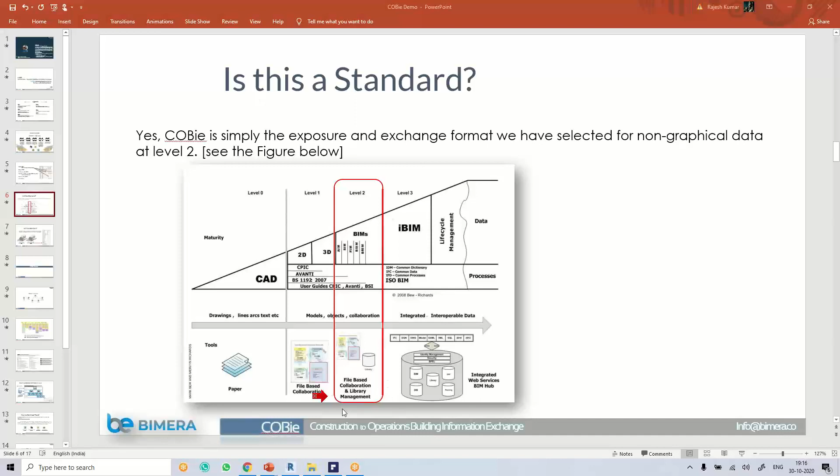Okay, when it comes to level 3, integrated BIM, of course most of the companies are not up to these standards. Okay, let's skip that for now. Level 2, file based collaboration and library management. Okay, so what is COBie actually? How to set up all this stuff, today we are going to see that.

Okay, this is a basic example of how we follow the training. Day 1 and the complete data would be the documentation itself. Now we are not going to discuss any kind of documentation here, because if I start explaining the documentation, it will kill 2 to 3 hours. Okay, so we are skipping it. I'll just show you how it works, that's it.

Okay, well, let's see this COBie process. COBie is very easy, guys, unless you don't understand that basic phenomena, and there are some key concepts. For every tool there are key concepts. If you understand the key concepts, it's very easy. It's damn easy. Okay, so you have to record it. For each and every step, you have to do some personal R&D from your end. Okay, understand?

So what is this 5-step process, as I explained and published on LinkedIn and WhatsApp and some other social media? What is the 5-step process? This 5-step process is enough to create a spreadsheet. Understand? So what is that? Set up project. The first one, how to set up a project, second, how to create the zones, third, select and update, and set up families and create spreadsheet. That's it. These are very basic and easy as well. It's not that tough actually.

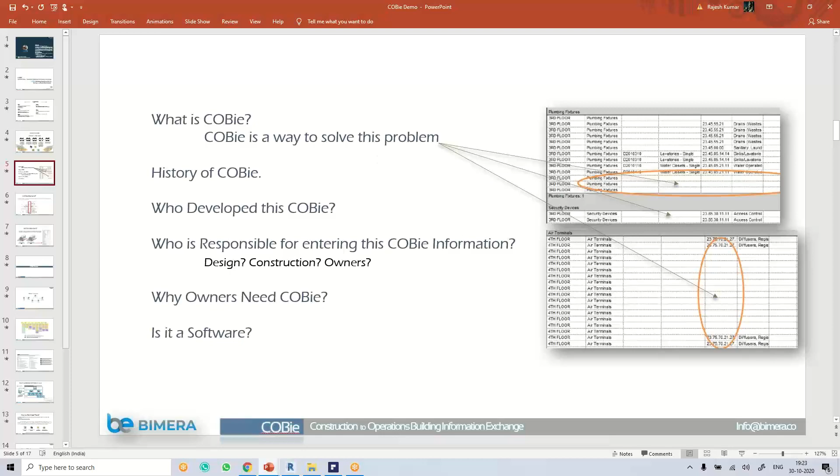Correct? Okay. Finally, is it a software? Yes. Is it a free software or a paid software? It's a free software. You can install it from biminteroperabilitytools.com. Okay, fine. So let me show you what COBie looks like. Let me open one spreadsheet, the basic spreadsheet, how it looks.

Guys, do you know how to download this tool? Or do you know? Sir, I don't know. Okay. No, I don't know. Okay, great. Then I'll just show you.

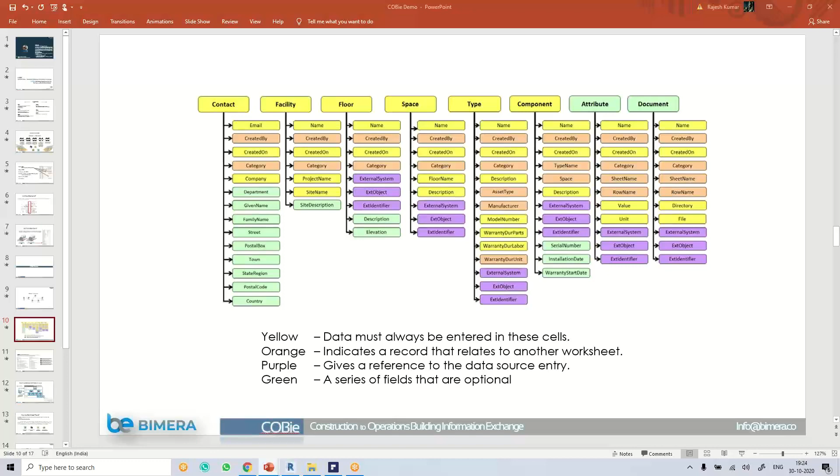Okay, see this. There is a website called biminteroperabilitytools.com, COBie extension revit.php, where it maintains a number of versions. If you're using Revit 2018, you just have to click on 2018, and there are Autodesk Classification Manager for Revit, Autodesk Model Checker for Revit, Autodesk Model Checker Configurator, Autodesk Enhanced DWG Exporter for Revit, Autodesk COBie Extension for Revit, and Autodesk COBie Extension for Navisworks. Okay, for now let's skip this.

Okay, what is all this stuff? What is this model checker and what is the model checker configurator? These are not individual components, not individual tools. When you install any one of these, the rest will be installed automatically. So it's like a package. So if you install Autodesk Classification Manager for Revit, that is what we are going to play with, and Autodesk COBie Extension for Revit. You can download that from here. Let me copy this.

That's it. You just click on download here and it will take you directly to this. When I click on Revit 2021, one setup file will be downloaded. And once you've installed it, you can see it in the BIM tools. In the classification manager we have a number of panels: the classification manager, COBie extension, model checker, and the configurator.

In this demo, I'm going to explain in a very short way so that you can easily understand, and I'm going to skip a few things which are not required. So I'm going to skip the configurator and the model checker. We are going to see the classification manager, which is actually required and a must. You know what required means: if there is a star mark, you must fill that.

So what is a classification manager and what is the COBie extension? COBie extension is nothing but this: set up families, set up project, contacts, zones, select, update and create spreadsheet. That's it, this is what the COBie extension is. Let me place it into the same position.

Now the classification manager - what is it actually? I told you before, every company should maintain some proper standards, in the form of two ways: one is the Omni class and one is the Uni class. These are actually the database.

Most of the companies will use Omni class. Omni class is also similar to the Uni class, but it is very detailed, well detailed. If you're maintaining some sort of a Uni class, then you can go with the Uni class.

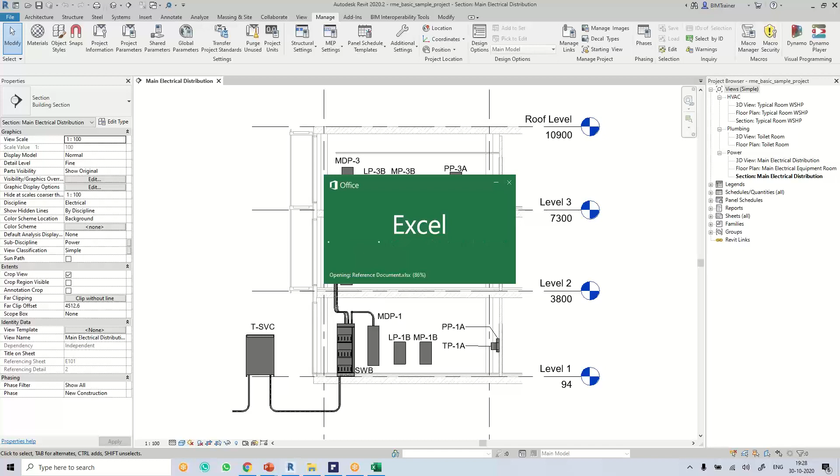What do these colors mean? Why do we have different colors? Let's go and read the basic stuff. Yellow color means it is required - it must be there, you must fill that information. When it comes to orange color, that is a reference from a different sheet or from the pick list.

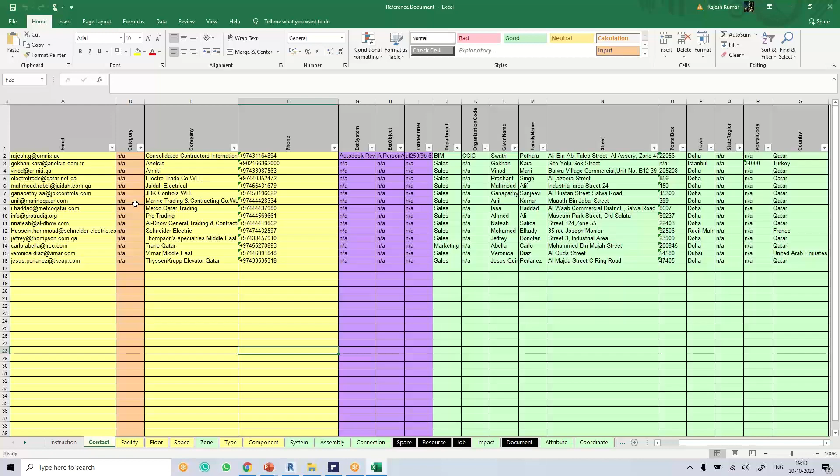So the yellow one is required. It means you must fill this contact information when you submit the COBie spreadsheet. Each and every row should be filled.

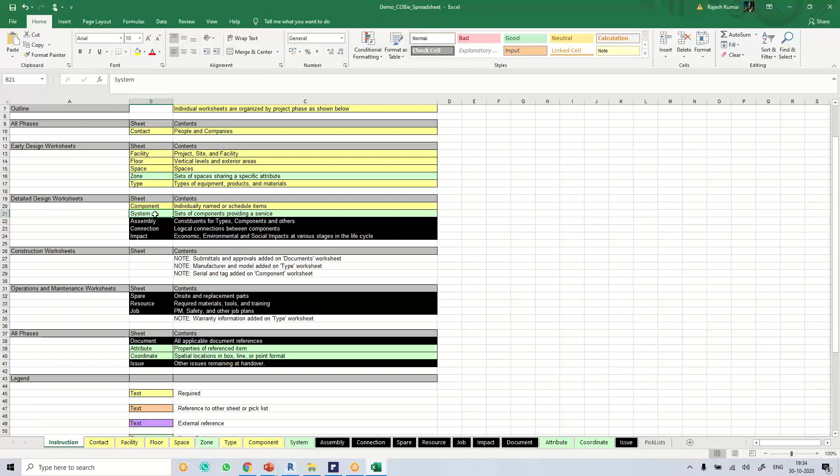And when it comes to system information, like mechanical systems - HVAC duct systems and such information - that's required only if needed, then you have to fill it. Clear? Okay, so let's say this is how actually the data would be.

Now, where are the parameters in this? If I fill a value inside a parameter, where could it be seen in the spreadsheet? This is a tricky question here, and I'll make it simple for you. For example, if I want to fill this company information, what do I do? There is a simple technique here.

What is this? It's a COBie spreadsheet, correct? COBie.contact - see, what is the sheet name here? It's contact, then dot, then company. So where you have to fill that, there is a parameter name called COBie.contact.company. If you fill some information there, it will directly reflect here, it will come and sit here.

For example, if you want to know the department, where is this department? This department is in the contact sheet, so contact.department. And what is this? It's a COBie tool, so COBie.contact.department. There is a parameter called COBie.contact.department. If you fill the value there, it will come and print here. That's it, it's a very easy thing.

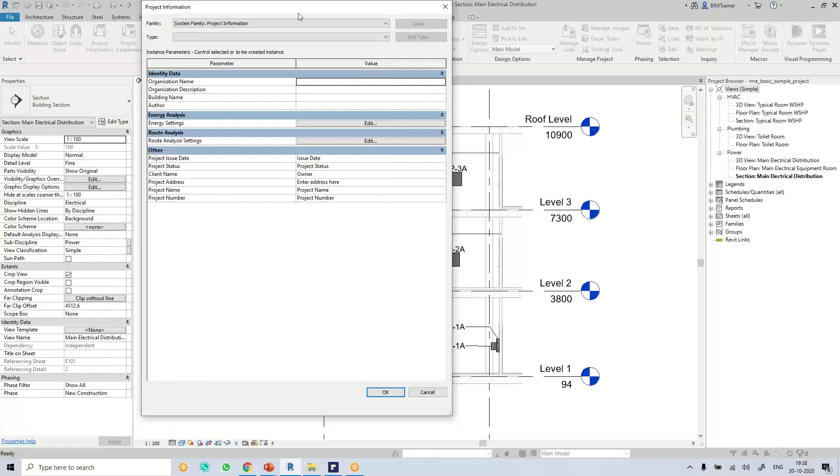So where we don't have information - see, energy settings, route analysis settings, and some other things. Now go to Project Parameters. There are no project parameters related to COBie because we haven't generated anything yet.

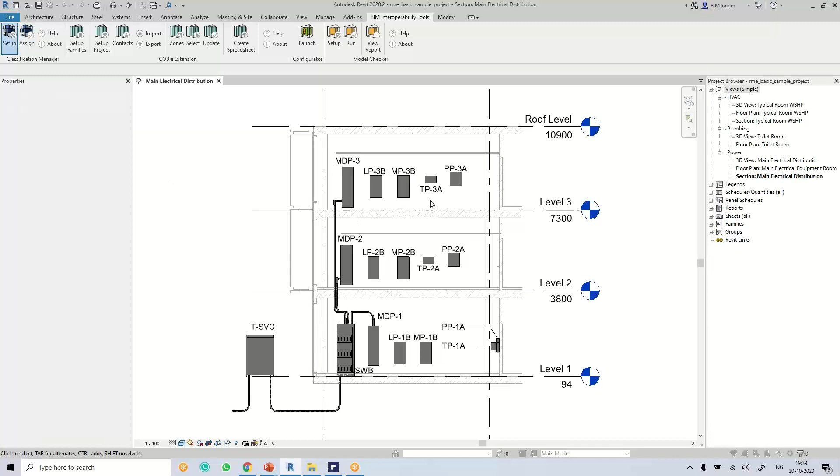Okay, let's start doing that. Before that, once you install this, go to the Classification Manager and click on Setup. This is the basic setup you have to do first.

While doing this step, you have to be confident about which standard, which class of standards you are going to use - either UniClass or OmniClass. These two are quite different, but the data being stored is almost the same; however, the way of representation is completely different. So what is OmniClass and what is UniClass? Let me show you here.

When you fill this in, OmniClass standards are completely different from UniClass. For example, this is some number information, and this Site Product is some other information - these two are in two different fields.

When it comes to UniClass, PR underscore 15 - what is PR? PR is like products which will replace the table from construction. There are a number of different tables actually. I couldn't show you all here because it's just a demo. So what is PR, what is EF, and what is AC? I mean, which are the activities.

For each and every process, they are maintaining some sort of code from a codification manual. It's not that you blindly follow yourself - there is a proper codification manual and you must follow that.

Let me minimize this. So now I have used this UniClass and OmniClass. If you don't see any recent items, you can go to the public library and choose either the OmniClass database or UniClass database. Let me go with the OmniClass database for now.

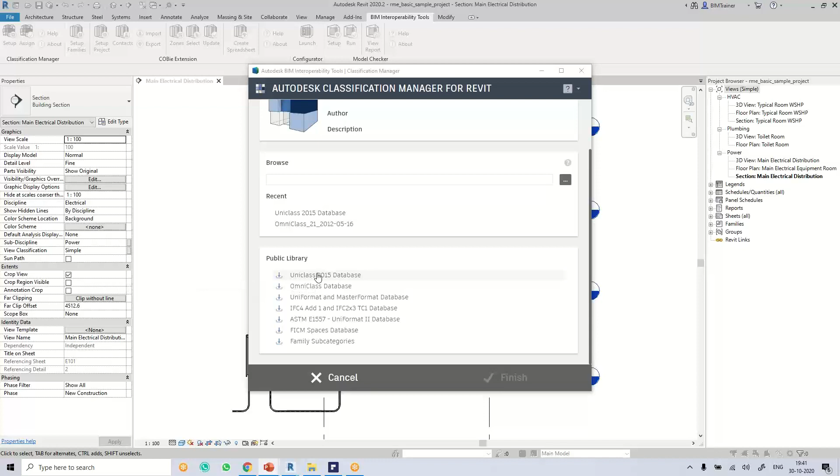See, this is from CSI, and this is Autodesk with the description: OmniClass database for the Classification Manager for Revit. This is a database in XML format. Let's click Finish here. Now it's importing some information and adding new parameters into this model.

Okay, done. Let me go and check - go to Manage, Project Parameters. Now see, there are a number of parameters, 1 through 10. Some 8 or 9 parameters were added, like Classification.Facility.Description.

Facility dot number, OmniClass 21, description 21 number, description 22 and 22 number. What are these 21 and 22? It will take time to explain, but let me go with this flow. Let's click OK. When I click on project information, see, the classification dot facility description and the number are added here.

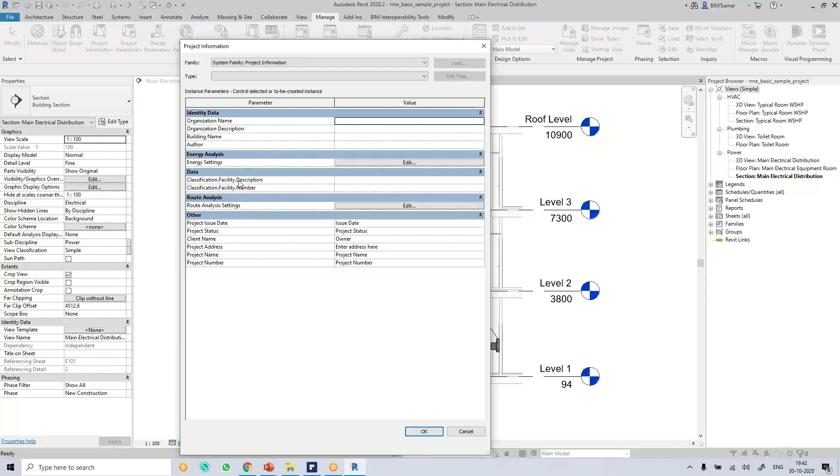How do you know that? Classification dot facility. No other parameters will be created by us using dots. If there are a number of dots, it means it was created externally. So that is the only way you have to remember whether the parameter was created by COBie or by you. So classification dot facility dot description. Okay, fine. Where else can you find it?

For example, go to this edit type, where there's nothing here. Let me select one of the model elements. Can I see the parameters here? No. If I click on edit type, see, inside the data group, classification, OmniClass 21 number and 22 number and 21 description and 22 description. Why are these empty and who will fill this? Do you want to fill it manually or will it fill automatically? So you do have these kinds of questions in your mind, correct?

So when it comes to COBie, there are two methods actually. One is autofill and the second one is manual fill. Some information would be filled by yourself, but you have to do some steps. And in most cases, around 25 to 35% will be filled automatically, and the rest of the data you have to fill manually.

So COBie is not that easy. You have to maintain a lot of standards. If something went wrong, you should know how to troubleshoot it. Sometimes it will not revert; you can't undo it once it is done. Then how do you do that? There are a lot of steps to do. That is the troubleshooting. For every process, if you've done something wrong, there is a solution for it. You should know how to resolve it. That's it.

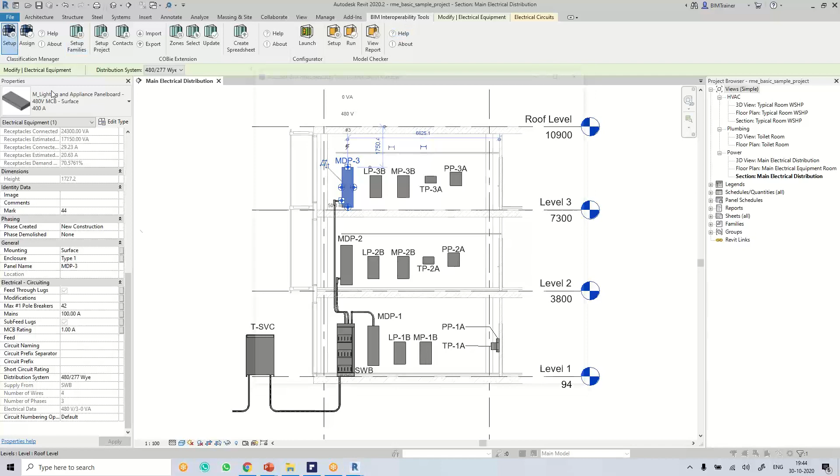Now let me explain how to fill this data. Click OK now. It's done. Go to the BIM tools. When I click on setup here, I choose the database. That part is done, so I don't want to do anything here. Let me cancel. This is required only one time, to choose the proper database, and then you will never touch it. What is assign here? When I click on assign here,

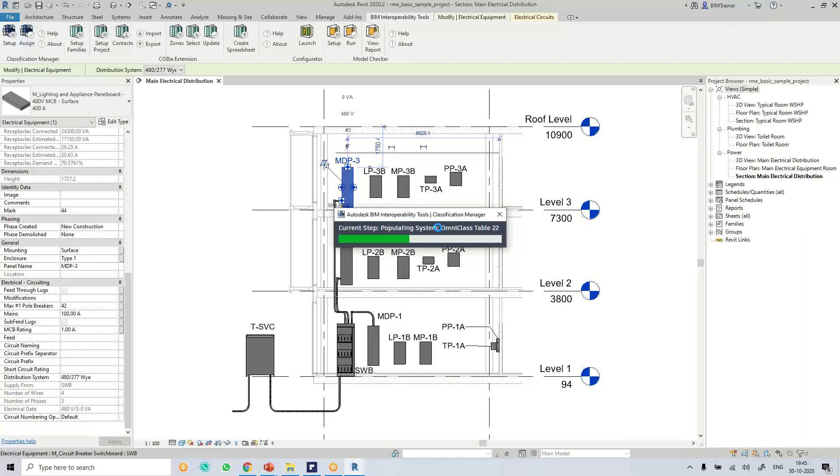it is reading OmniClass table 21, table 22, table 23, and there are a number of tables actually. What are these tables? You will come to know now. Let it load. It won't take much time, less than 10 to 15 seconds. It's done now. Now classification, assign classification and options. So assign similar classifications and set COBie parameters. You must check this, otherwise it will not fill any COBie parameters. You will understand it later.

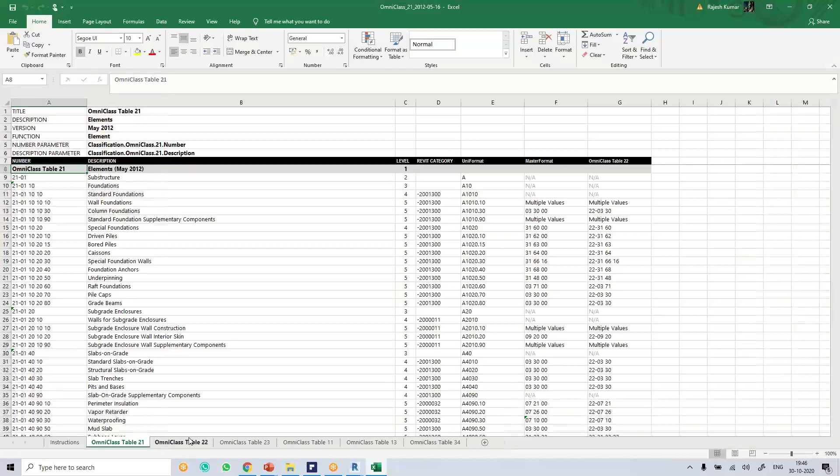So facility, OmniClass table 11. What is this table 11 here? And what is OmniClass table 21, 22, and what is element here? If you want to understand, let me show how the OmniClass table, the spreadsheet, looks. So this is a standard actually. The instructions are quite common. OmniClass table 21, read this. OmniClass table 21, table 22 and table 23.

Those who are in the planning department or the estimation department can easily understand OmniClass table 21, 22 and 23. Guys, if you want to work with COBie, you have to sit with your procurement or planning department, those who are doing estimation, to understand the standards of OmniClass and UniClass, because only they can tell you exactly what type of standards they are maintaining.

So OmniClass table 21, 22, 23 and table 11. What is table 11 here? What is table 13 here? What is table 34 here? So for each and every table, when you are extracting or filling information, it is reading the data from this.

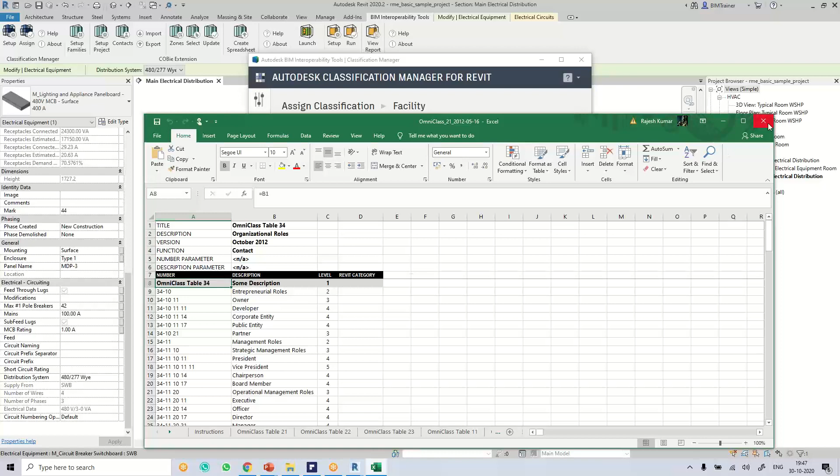Understand? So this database, the complete database, we have loaded with the help of the setup. So that's what we loaded here, and now we are assigning from it. Okay, so let's say I just selected one element here, correct? Let me select this. Let me go back, and this is a component. Let me show you which is element information, which is related to the facility information, and which is some sort of a, okay, you will be knowing that later.

And let's say what type of a table is this? Let's say this is an educational, this is a training institute or something else. So let me go with educational facility. When I click on educational facility, I mean, let's say assign here. So that is assigned, and it's saying parameter COBie.facility.category was not found on element project information. Sometimes it shows the warnings, but it will be executed once.

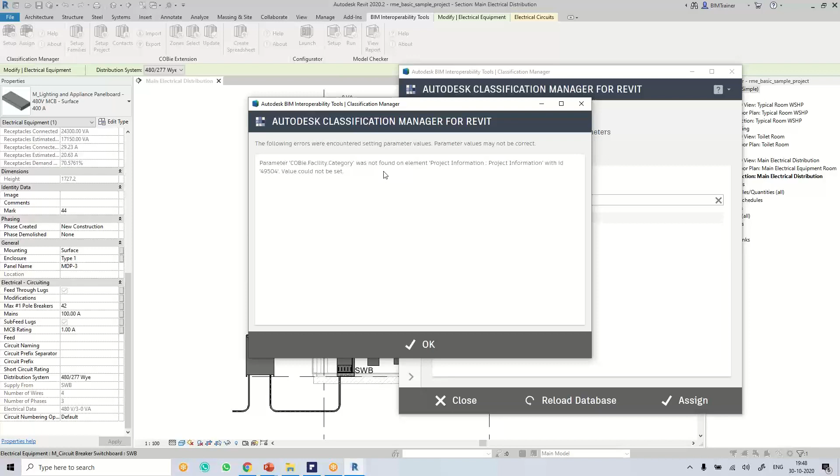I mean, it has a number of steps inside it. The first step, the second step, the third step, and the fourth step. So the first step it is cleared, the second step it was filled, and the third step it was filled. Then when it comes to the fourth step, if it is not filled, then it will show a warning. So let's keep this warning for now because we haven't created it. We will create that later. Okay, so the OmniClass table 11 we have already assigned.

Let me go back to the element and let's read this. Table 21 and table 22. What are these tables 21 and 22? If you understand the Revit hierarchy, each and every element has its own ID, correct? Each and every type has its own ID, each and every family has its own ID, and each and every category has its own ID. ID means element IDs. So element IDs for the elements, the types, the families, and the categories are different. So this is what we are about to fill in the same way.

Let's say when I select the electrical equipment, it's directly showing that you have selected an electrical equipment, and what type of electrical equipment is it? So I want to fill some information into the classification because it's a classification manager. We have some parameters added over there. Click on edit type. We have OmniClass number and classification. These four are related to the classification. So I'm going to assign something from table 21 into these parameters. I'm just mapping it. Let's see how to map that.

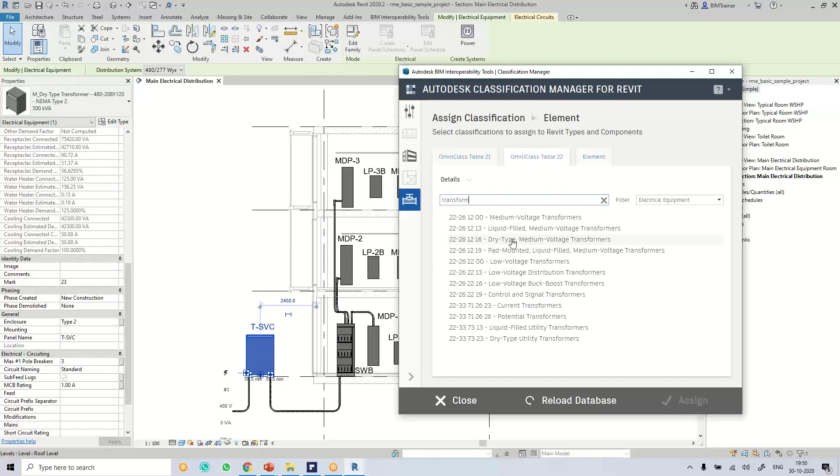Let's click OK now. So what is this? Of course, it's an electrical equipment and it's a dry type transformer. So let's say I start typing transformer here. Now it shows medium voltage transformers, liquid filled transformer, and dry type transformer. So if it is a lighting and appliance panel board, if I start typing lighting here, I can see lighting control panel boards.

It's different actually. Let's say I make this final for now. You have to maintain some standards. There are documents you have to work with, and based on that document, you have to understand to which category it is related exactly. You should not go blindly. For now, as this is a demo, I'm just explaining instead of wasting time. So lighting control panel boards, let me click on assign here. It's done. The warning is not related to the classification, it is related to the COBie.

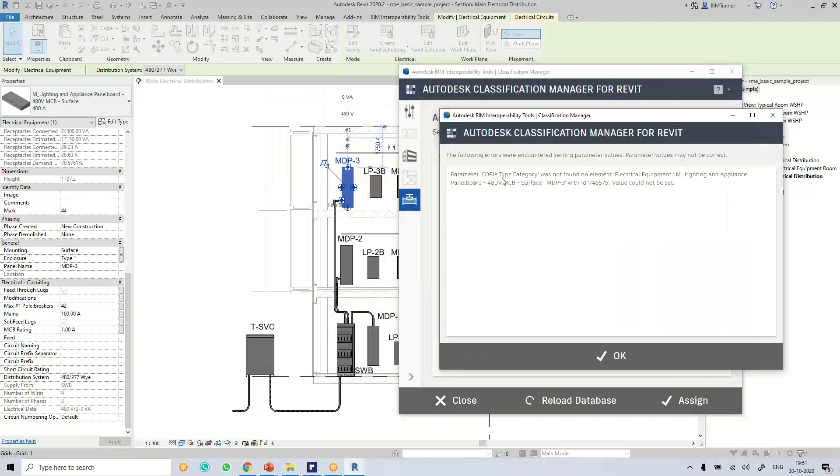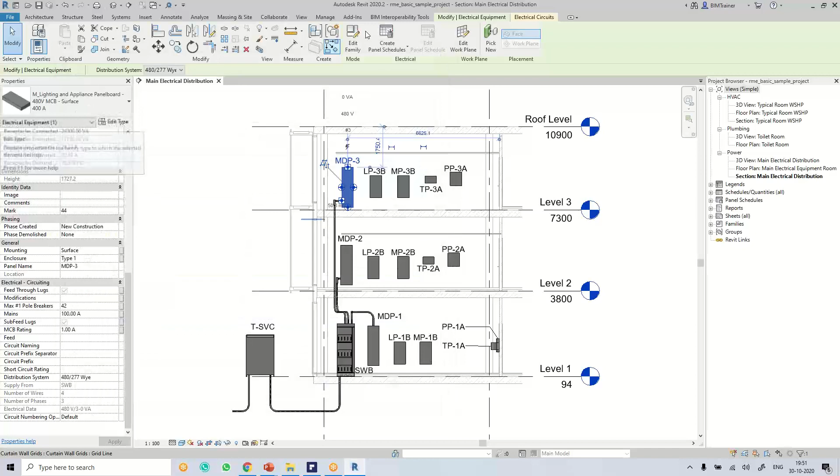So let me click OK now. Click cancel here. Let me close this. Now when I go back to edit type, the classification related to table 22 is assigned here, 22 number and 22 description. What about 21 now? Let's go to BIM tools and assign again.

So I have selected the same thing. So OmniClass, which is already assigned. Let's go back to table 21. And if I say transformer, sorry, it's a lighting panel board, right? So if I start typing lighting here, it's not showing lighting at all. You must fill this data, but it is not showing any panel board.

Okay, let me find it with the panel board information. Let's say it's a panel board. No, it's not there. Okay, what do you say? MDB, LDB, lighting distribution, no, nothing. Then you have to choose based on the standards. Okay, based on the filter.

Okay, electrical equipment, see there's services and site work. Is this related to the services or to the site work? Okay, let me go with the services. Is this related to electrical or integrated automation? Electrical. Expand this. Okay, what is it related to exactly? Electrical service and distribution? Yes, of course. It is related to the distribution. And okay, electrical service and distribution supplementary components.

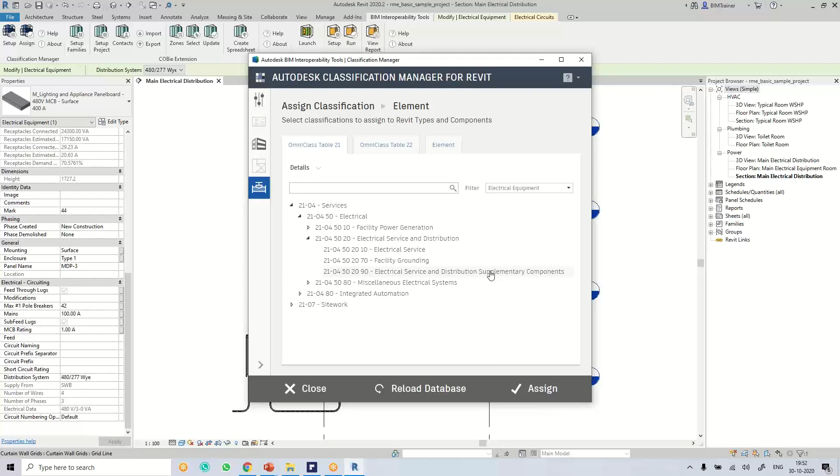If you could not find the actual category of this, then what do you have to do? You have to open some documents which are required to find out what to fill in this case. Okay, clear now. So let me assign this for now. It's saying it's already assigned here, and there is a warning which starts with COBie because there are no parameters related to COBie, because I haven't added them till now.

Okay, let me go back to this edit type. See now, it's so easy, correct? When it comes to the classification, it is very easy. So OmniClass 21 and 22 were filled. Okay, now these are not the only things, right? We have a lot to fill. For example,

when I click on this, oh, what is this? It's a conduit. Okay, so when I select this conduit, why in the OmniClass table 21 filter is there no conduit at all? Then how can I fill this information? If there is no conduit at all, how can I fill this information here?

Correct. So when I select this OmniClass table 21, if I shift to this, now it is saying it's a conduit, because it knows what the proper selection was. It knows what was selected, and it's saying conduits. But in OmniClass table 21, there is no special category like conduits, so that is the reason it is in a dilemma now. So you have to think which category it represents. Okay, so then you have to fill it manually.

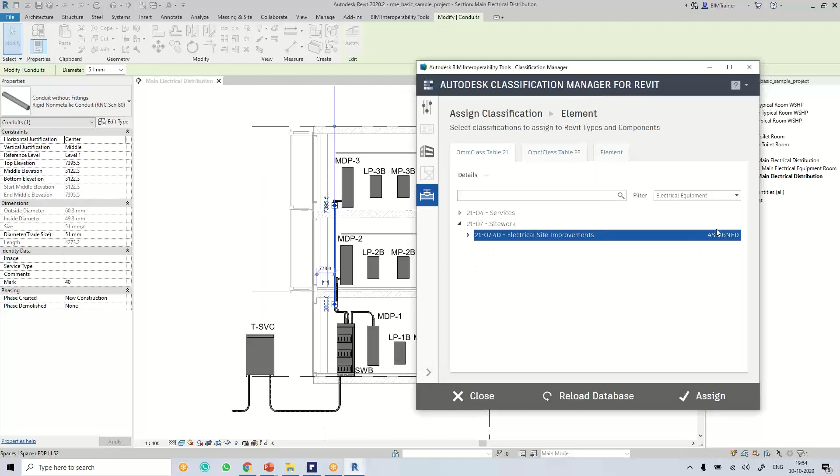So if it is related to the site work, let's go to site work and electrical site improvements. Click assign. Okay, so it's done. It's saying it's assigned here. So when I click on edit type, it is assigned here. Electrical site improvements.

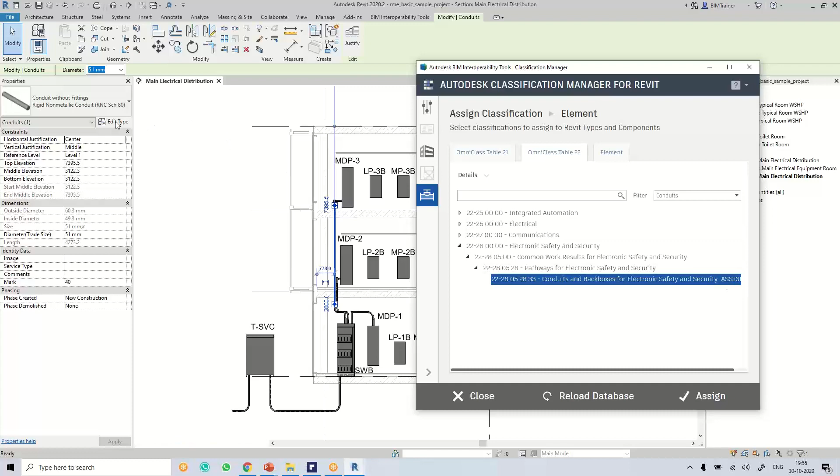Okay, in the same case, let me go with conduits, like safety and security and common work pathways. Select this conduits. That's it. So it's assigned. It's saying it's assigned here. So when I click on edit type, it is assigned now.

Okay, so these are the classification parameters, and how to load the complete parameters. I'm going to create a spreadsheet now to see how it exactly works. Before that, let's create the COBie parameters as well. Why? Because we keep getting the warnings. COBie.Type.Category is not there, COBie.Type.Name is not there. So these kinds of warnings we keep getting. What we have to do is load the COBie parameters into each and every element. Okay, how to do that?

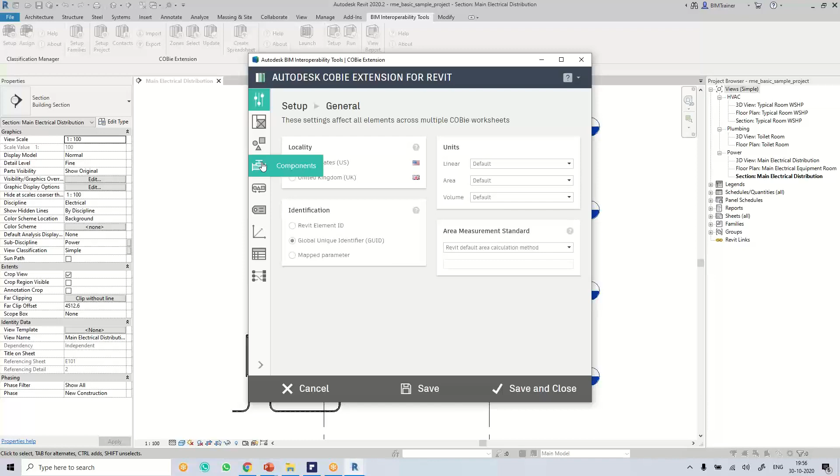Go to BIM tools again. Not this setup or this assign, we have the COBie extension. So just click on the setup project here, and here you have to maintain some proper standards. So you just have to maintain some proper standards. So what is this Autodesk COBie Extension for Revit?

Let me expand this here. So general, spaces, types, components, systems, attributes, coordinates, schedules, parameter mappings. That's it. We don't have anything else, guys. It's very, very easy. We have general, spaces, types, components, systems, but maintaining this is not that easy actually. Okay, so click on general.

Okay, click on General. So let's go one by one. It won't take even 5 minutes. Okay, we have 15 to 20 more minutes. Yeah, 15 to 20 more minutes. Let's finish it very fast.

Okay, so Setup, General. So I'll just go with the US standards and linear. If I'm using a metric system or imperial system, based on that system we have to go with feet or millimeters. So let me go with millimeter now. Square meter, and volume is cubic meter.

And area measurement standards, we have a number of standards, like BOMA, like industrial buildings. For industrial buildings, there is a different kind of area measurement method. If you want to understand all this stuff, you have to attend the sessions actually.

When it comes to the identification, it's either an element ID or a GUID. Generally it comes with the GUID, but for now I would like to show you something, so I'll just go with the Revit element ID. The default is GUID only. Okay, so the Revit element ID. Come back to the spaces.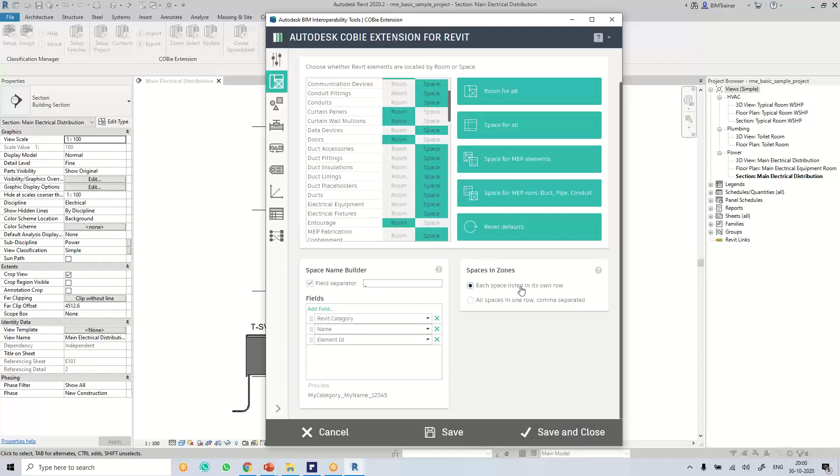Okay, so let me go with this. Each space listed in its own row. Let it be. Again, the same for the type name builder. And when it comes to the category, for example, if I want the category information to be filled here, what do you do exactly? The Revit OmniClass parameter, it's under the type and the category. For example, if I go to the Excel, where is the Excel? Let me open that Excel here.

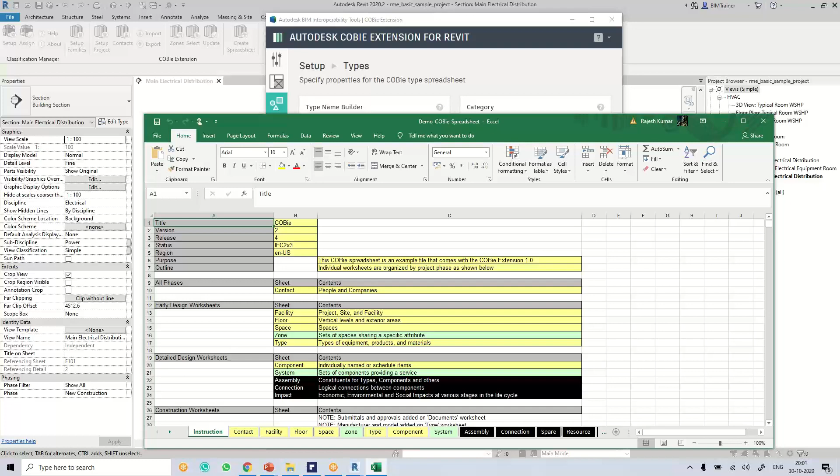See, if I fill this category information here, it will come in the type dot category. So inside the type, inside the category, it comes and sits here. See, type and category. So COBie dot type dot category will be filled if you fill that information here. So what are we saying here?

So OmniClass, let me go with the class OmniClass table 23 parameter value, and let me go with the OmniClass table 22 and 21. Why do we have to take this OmniClass table 23 and table 22 and table 21? That is because of the standard, because we are following OmniClass. Then why we have a number of things here, you will know that later. Okay, not now. It would be very detailed actually. So fine. Description, it's a family type, leave that as it is.

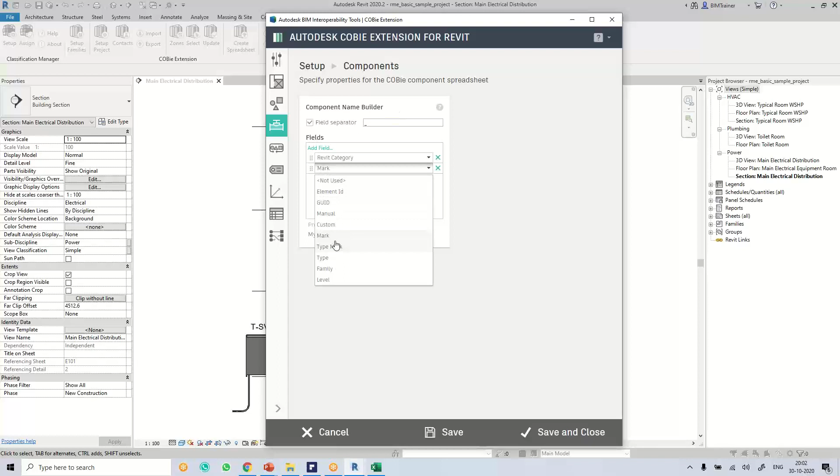So when it comes to the component, components is a different sheet again. Okay, if you fill something here, it would be directly reflected into that sheet. Okay, so it's a component name dot builder. Let me go with Revit category, let's say family, and if you want to add element ID: Revit category, family, and element ID. Okay, let me go with systems, and system it is fine. So let me go with OmniClass 21.

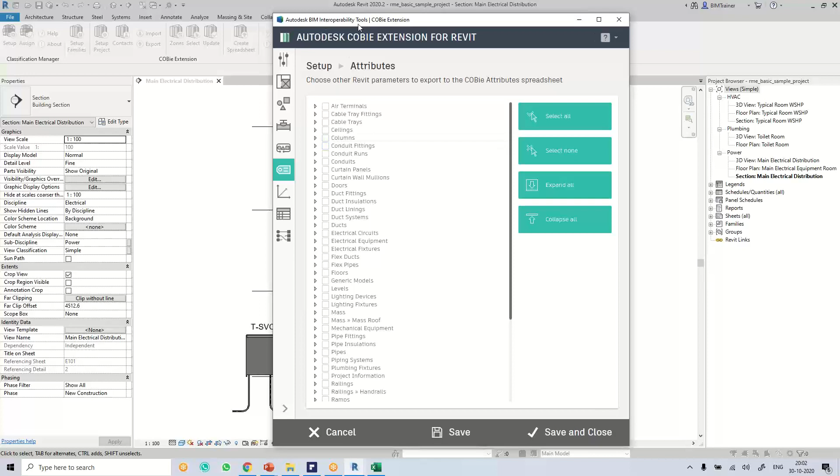Okay, so let me explain to you what these attributes mean. Attributes are nothing but parameters, guys. For example, if you want to export some parameters which are related to any of the elements here, for example, the parameters of a particular electrical equipment. Let me go with the electrical equipment here. I just export selected here.

What is inside the electrical equipment? Let me expand this. So I can see the type parameters here, and I can see the instance parameters also here. Okay, you can turn on and turn off which are required and which are not required. Okay, so for now, let me go with electrical equipment, the complete electrical equipment, type parameters, and instance parameters as well.

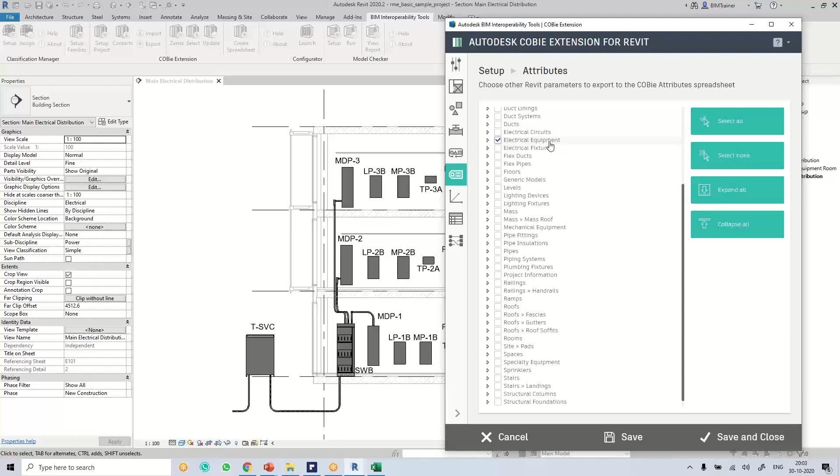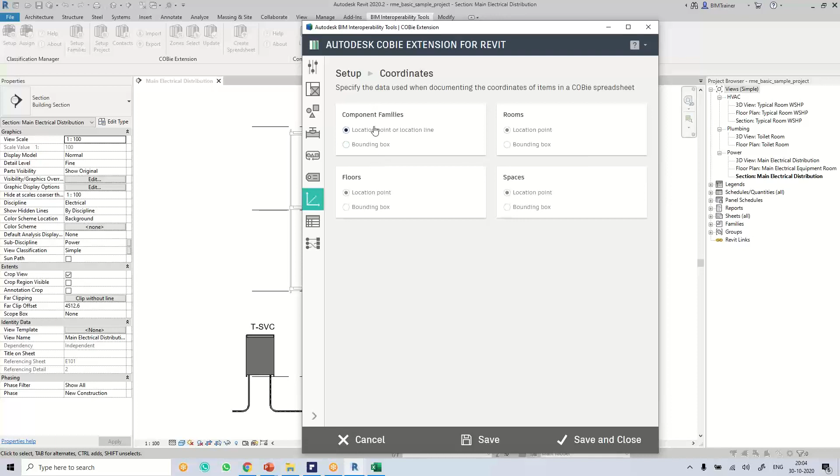If you are a Dynamo expert, basically I'm an automation expert, so when I need this COBie spreadsheet, I'll just go with the bounding box information, not the location point information. Why? Because if you want to create a number of views for each and every clash, then I need bounding box information. So what I do is, I'll just go with the bounding box. Okay, fine, skip that for now.

And it's parameter mapping, guys. This is a very dangerous thing when, for example, you want to fill data into a particular spreadsheet. For example, I want to fill some data inside the description, the value of this far clip offset or something like view name information. How do you map this view name parameter with COBie dot type dot description, which is in the type sheet?

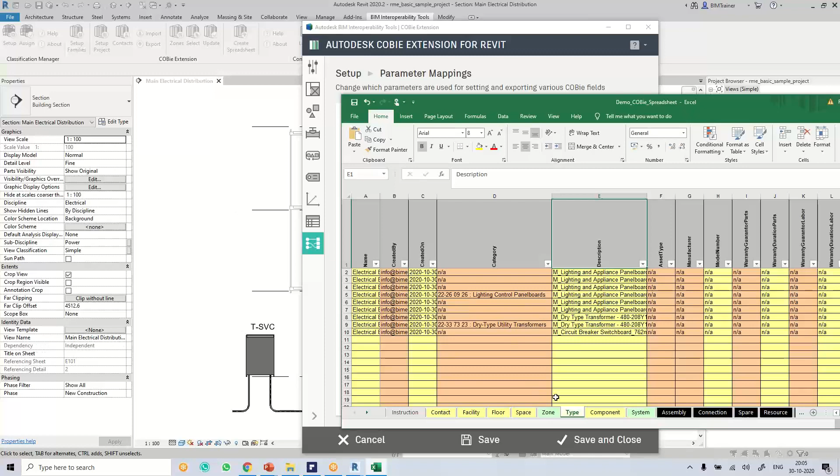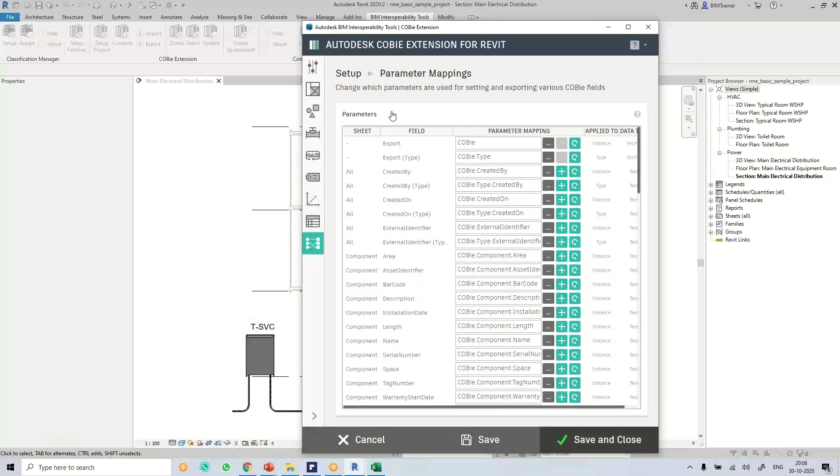That is the technique here. That is what we call parameter mapping. Okay, so that's parameter mapping. So now I'm done with this. Let me click on save and close. It's done, and it's exporting.

It will take some time. Guys, do you have any questions till now? Anybody? Anyone have any questions? No, sir, no problem. Okay.

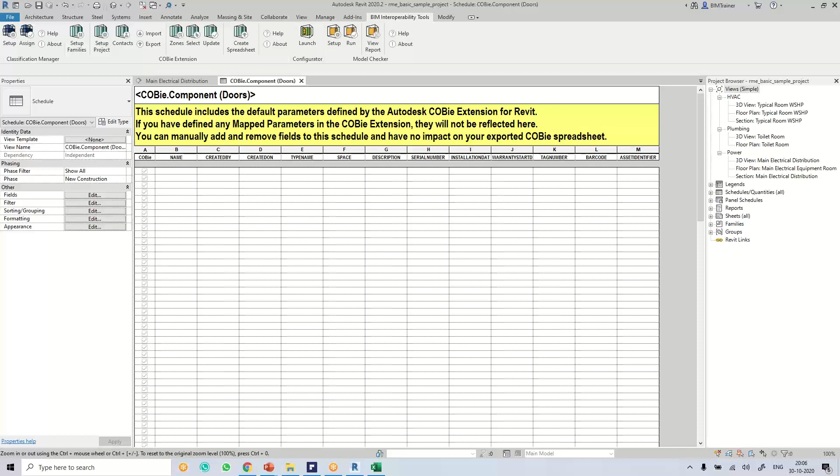So this is how actually the COBie spreadsheets were like. If I click on schedules here, see COBie component doors, windows and room spaces, duct systems and electrical circuits and piping systems and switch systems. These were created by default, because we have chosen over there. That's the reason they were created. Let me close this.

And when I select any of the model element, now I can see the COBie parameters here. Correct? So are these only the COBie parameters? Don't we have anything else?

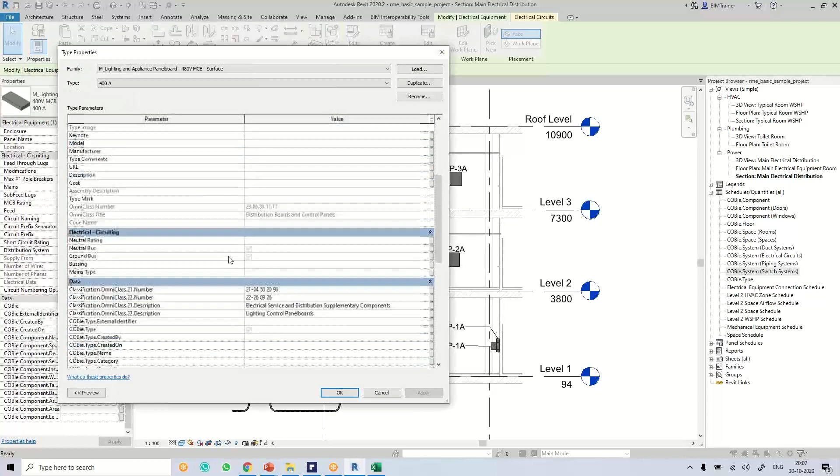Click on edit type. Now you can see the number of parameters created within the type. Let's understand the basic thing: we have COBie dot created by, COBie dot created on, COBie dot component dot name. So these start with COBie dot. Here for each parameter which starts with COBie dot type dot...

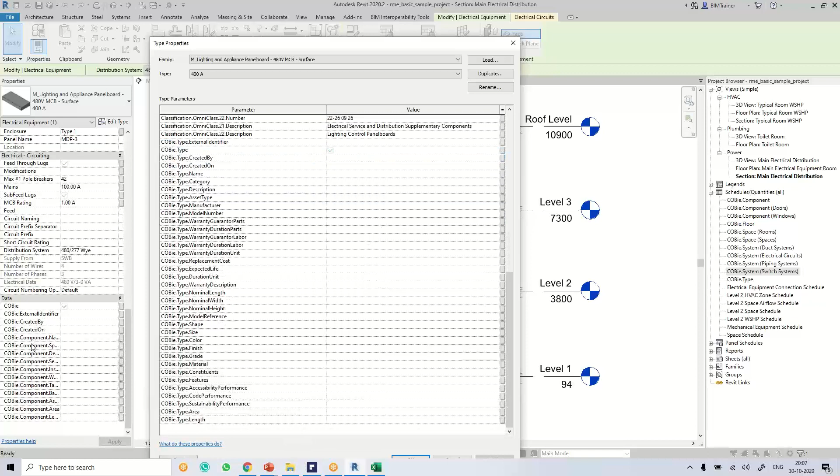Because why? Because these are type parameters. So these are type parameters and these are the COBie parameters. So COBie instance parameters and these are the COBie type parameters. Understand? That is the reason we have two different things. COBie dot created by, again we have COBie dot created by, but it's a type created by.

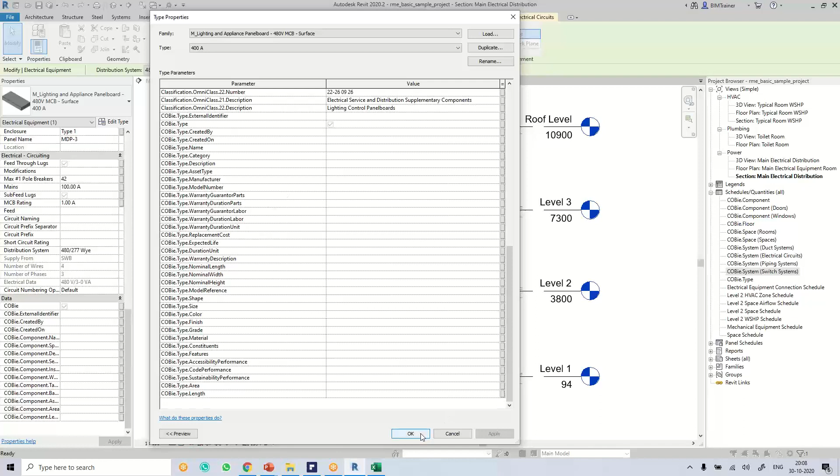Yes, Abdul, it will take a lot of time to understand the setup and all. Okay, let's click OK now. It's done. Now what is the next procedure?

For example, if you want to export this information, there is one more step which is pending, like contacts. Because the model should know who has created this. In that case you just have to click on the contacts. When you click on contacts, like created by, so nothing.

So let me create one email ID: create a person, info at bimera.co, and company name it's like BIM Era Private Limited, and phone number 055749192.

Category - what is this category here? So who am I actually? What type of a person am I? If I'm a designer, if I'm a modeler, okay let's say I'll just go with designer. Let me set this as a designer. Now this is the category code for the designer.

And these are optional information. Why is this optional? Because these are cyan color information. Given name, let's go with Kumar. Family name it's Golla, department it's BIM department, organization code it's BE 1923. Okay, and street name 01.

22336 something, and town it's Dubai. State region are the same, like Dubai only. Postal code 22336 and country it's UAE.

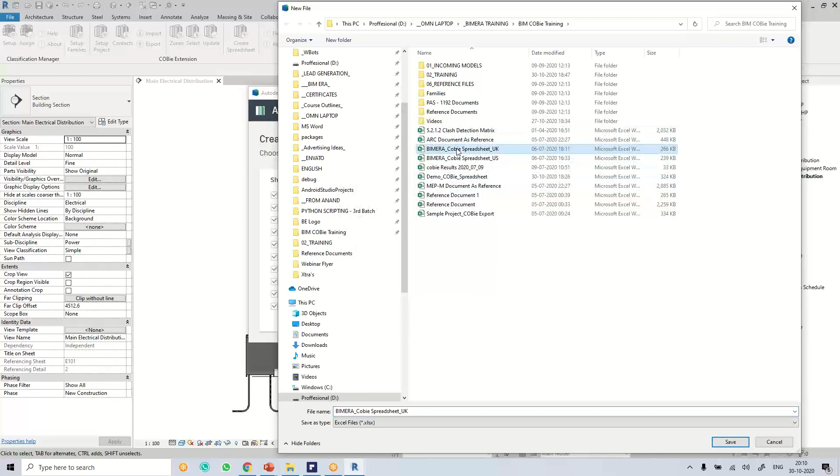BIM Era COBie spreadsheet, demo COBie spreadsheet. Let me go with this. Replace with.

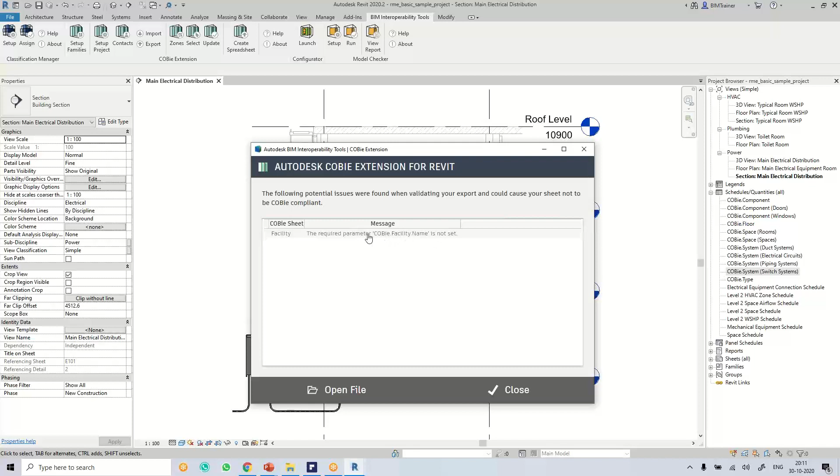Okay now what it is saying, this is a warning box guys, so this is a warning. So what it is saying: the required parameter COBie.facility.name is not set. Okay so where do you have to fill this? Where do you have to fill this? You should know this. Before that, let me go and open the file.

So when I click on contact, see the information which is filled by me - it's here. So I'm the designer and the company name and the phone number information and the department and organization code, Kumar Golla and street name and Dubai and 22336 and UAE. So if you filled that over there, then it comes to your sheet. I mean, those who are acting as different roles, their information should be filled here. You just have to create a number of contacts.

That's it. Okay, so when it comes to the facility, see where I haven't filled anything here - I haven't filled anything here, so it's empty now.

So when it comes to the floor, I haven't filled anything. When it comes to space, nothing. Type, component, see nothing here. System, nothing, and attributes, nothing. Coordinate, nothing. Okay, let me go with at least some basic stuff.

We have 5 more minutes. So when I select these elements, I would like to fill this information and I want to see how to fill it. If I want to play with the electrical model, electrical equipment, then I have to go to the view and create one schedule quantities.

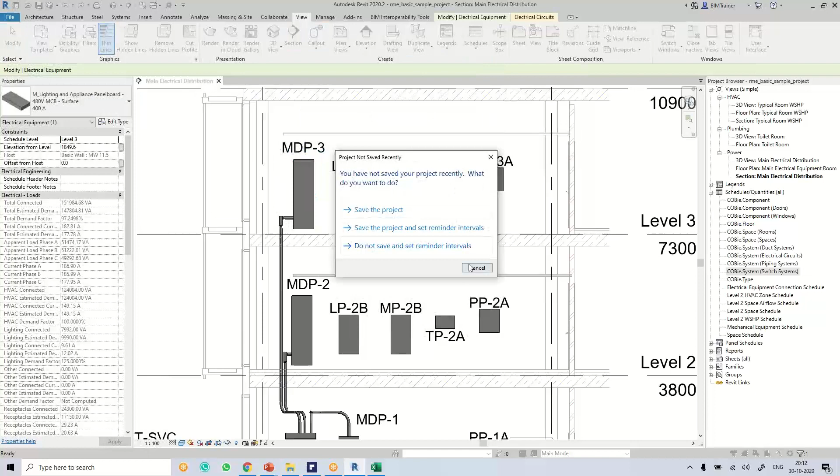I'm going to show you how to do this. It's like electrical equipment, click OK. And this is a different spreadsheet, not like a normal schedule. It's a COBie schedule, so I have to fill all the stuff, COBie.type.

So the rest comes with all the COBie.type, so I have to fill everything. So what about the rest of the parameters, should they be filled? Of course they should be filled, but only when it is required.

Let me explain. See, there is a COBie.type.length, where we have length information here, and if it is required and you want to map these two, you have to bring the information from here to here. Understand? So in that case, since it is required, let me click OK.

So I have a number of elements here, and these are already filled. Let me go back to this sorting and grouping.

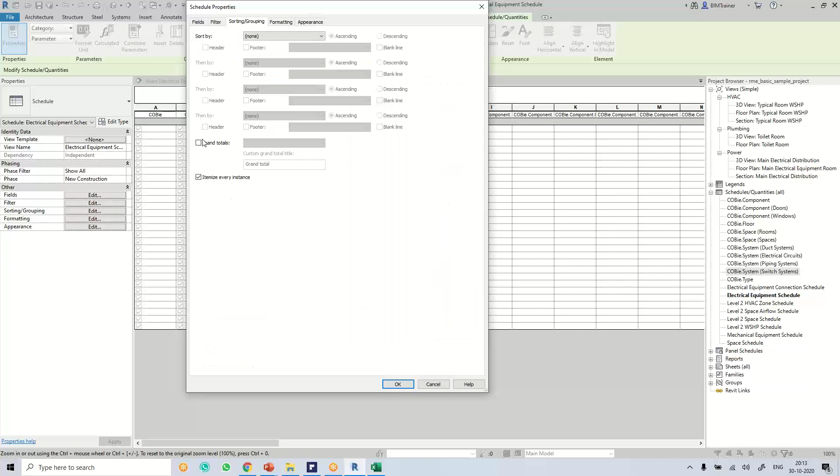Why did I set COBie.type to the beginning? Because if these two are not checked, you cannot export this COBie spreadsheet, even though we have some information inside the COBie.

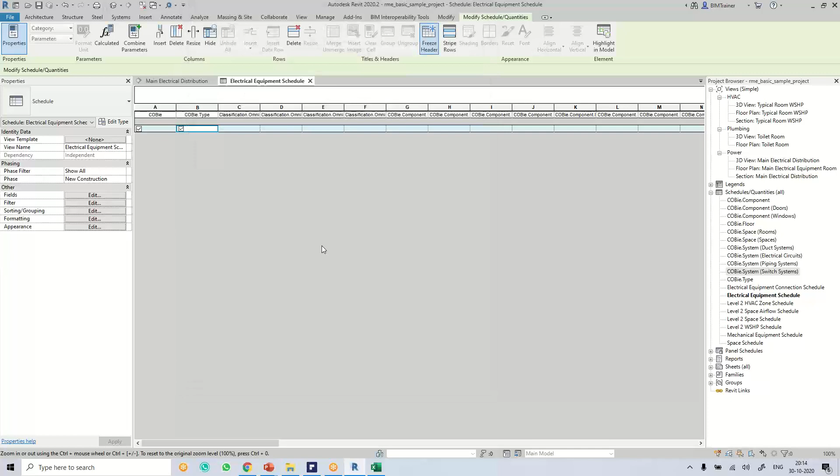Let's see, we have some information here already, but in the COBie spreadsheet, it's not filled, correct? Okay, let me go to the BIM tools.

If I click on update here, okay, set all for all, apply and close. Which is updating some information by itself.

So what is that? Created by name, net area, type.name, type.category. Some information will be filled automatically.

See this? Component dot name, COBie dot component dot name. I mean, see where there is a hyphen, see surface, and where there is an underscore, see electrical equipment is a category, M lighting and appliance panelboard till surface, that is a type family name, and the next to last 6 digits were the element ID.

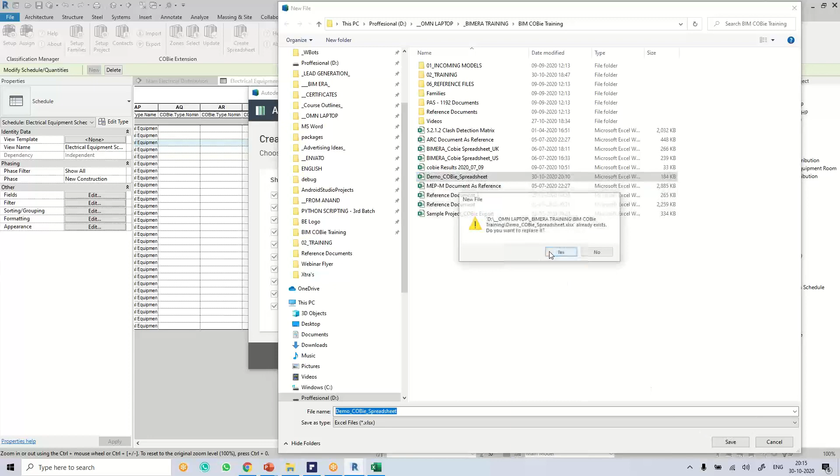So this is how it will be filled by itself, some set of information which is already there. Now if I create the spreadsheet, which is already closed, right? So if I create a spreadsheet, let me go with a new file, the same demo COBie spreadsheet. Let me replace this, and now I can see some sort of data.

That's it. Okay, now again, this is a warning. What it is saying: electrical equipment, M lighting, appliance, panel board, surface, and surface used by multiple elements. I mean it has the same naming convention. So you just have to fix these two actually. Understand? That's the reason it is showing that.

Okay, let's skip this for now. I want to open that file and COBie spreadsheet. In the contact information, it's common, and facility, floor, space, zone, type. See, now it is filled.

In the type name, earlier it was completely empty, but now it's filled with some information here. When it comes to the component, again earlier it was empty, now it was filled with something else.

Understand? So this is so easy to create, but when you create, when you're doing sort of things like system information, attributes, I mean the parameters, the number of parameters, see how big it is. We have a total of 2681 rows.

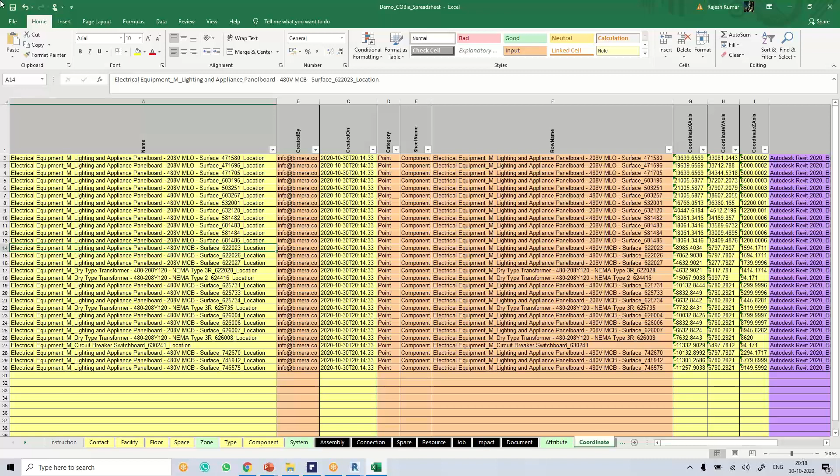It's not that easy actually. There's a lot of documentation that should be there. You have to understand the basics, the basic documentation. What are those documentations? It's like PAS1192. You have to understand what PAS1192 is, and PAS1192 BS standards, and ISO 19650. Out of 19650, there are some topics. You have to filter out all that stuff.

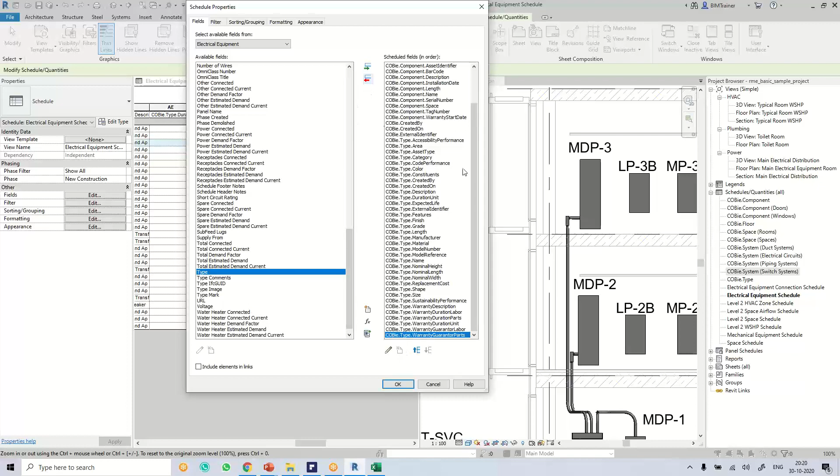Let me show you. For example, let me go to the electrical equipment schedule. Go to view, fields, sorting and grouping. If I go with the type - oh, there's no type actually, let me add type here. Okay, type is added at the last.

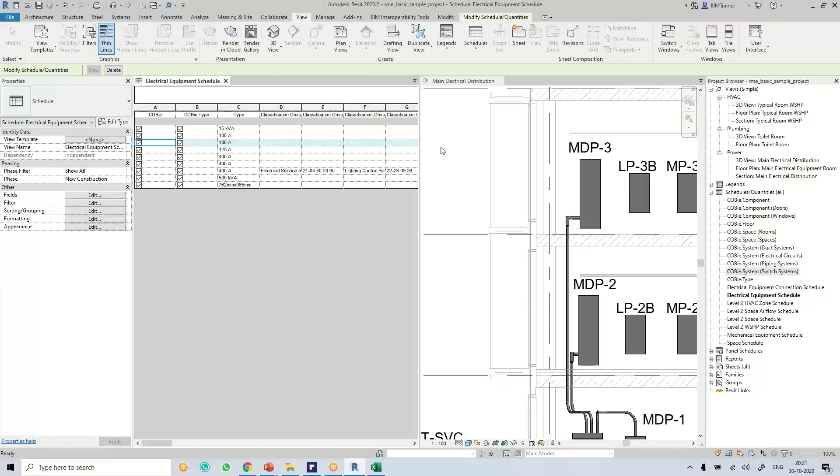Now it's a different type. If I want to select this - could you please mute your mics, guys? So when I select this, it's showing that I have a total of 3 equipments. If you select something inside the list, it will select the number of elements by itself, so you can simply go back to the BIM tools and click on it. If you want to assign some classification, you can simply assign that here, and if you want to assign something into the project, into the components, you can simply assign that there. That's it, it will directly apply.

For example, in our case we have 3 elements. If you have 300 elements, it will all apply at the same time for the 300 elements. Understand?

Yes, understand, thanks. What is the course duration, sir? This COBie course duration is like 1 week, it's like 14 hours training. If you're very good in understanding, we could finish it earlier.

But obviously, 14 hours, sometimes it keeps extending. If you want to play with big projects, it will take some time, either 2 hours more or it may extend to 20 hours. That's it. So what is the fees? That I'll discuss personally - what's your name? Rajkumar. Okay, fine. Text me personally so I'll explain you.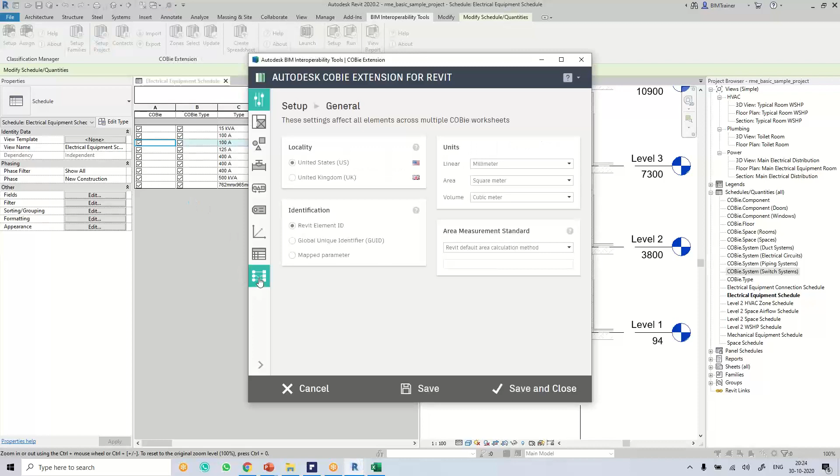So when you're playing with the electrical equipment and the mechanical equipment, the parameters are not the same for everything. The parameters would be the default for the electrical equipment and the mechanical equipment. Then, inside the setup project, there is a process called parameter mapping. Understand? So you have to keep changing the parameters here itself.

Once you've done the proper setup for the electrical equipment, there is an option called export here. Export the COBie settings and import the COBie settings. For example, if you're done with the electrical equipment settings, you can simply export, and you can create a number of settings for electrical equipment and mechanical equipment.

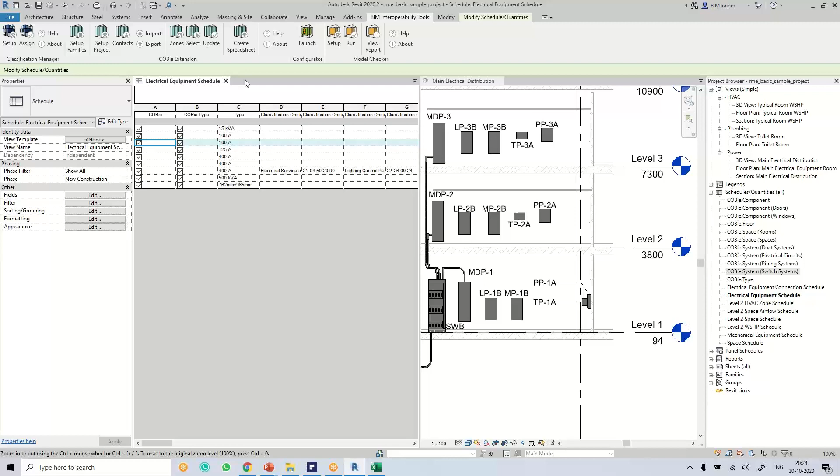And one more: once you're done with the electrical equipment schedule and have exported everything related to the electrical equipment, and now you are into the mechanical equipment, there's no need to create one more spreadsheet again. When you create a spreadsheet, there is one more option called append here. The existing data remains the same. It won't disturb it. So choose append here, then click on spreadsheet.

That's it. So along with the existing data, the new data will be appended. The mechanical model equipment data would be appended into the spreadsheet. These are the two steps to follow. Clear?

So yes, I understand. I will create the mapping for the electrical model and export the settings, open the mechanical model, import the settings in the mechanical model and append this data to the spreadsheet. Actually, it is a bit of a headache.

I don't know your name. What's your name? Malik. Okay, Malik.

So actually, it's not required. That is the toughest part actually. Exporting and importing, you have to do a lot of changes. If you are the only person working on the COBie model, then it's fine. But if a number of people will be working on the COBie model,

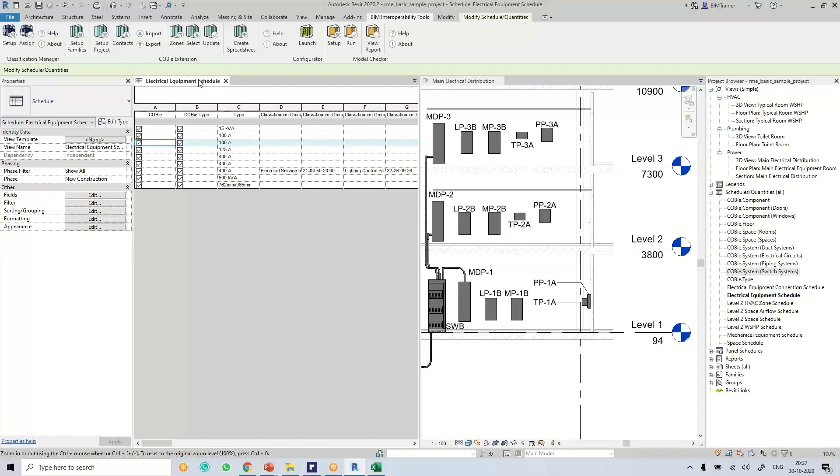Rajesh, sorry to interrupt you. Is it one-to-one? Can I say that from one model we maintain one spreadsheet, or from multiple models can you do a single sheet? Single Excel file. You can do that. See, how did I create an electrical equipment schedule here? Based on the categories. I'm asking if it is from a different file. Okay, file based. Then it's different.

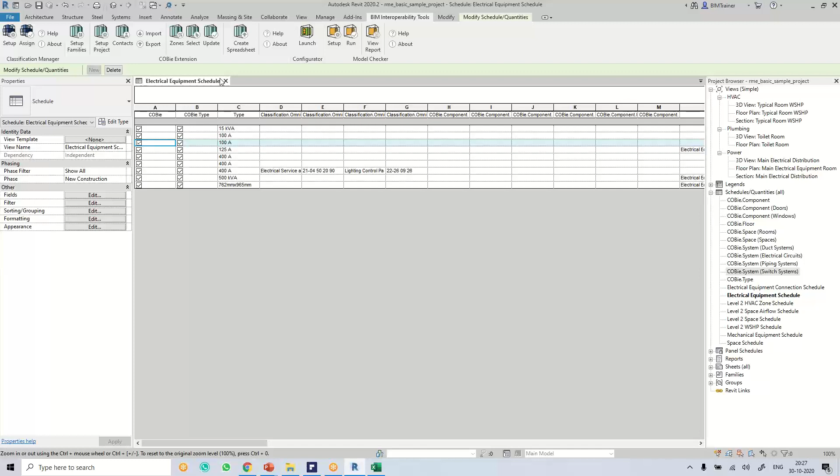Suppose I'm doing the electrical model in one file and mechanical modeling in another file, then you don't need to create the complete settings again. Some sort of changes would be required. Once you're done with the complete setup, you can simply export the settings and keep it aside. I'm just asking whether that Excel spreadsheet is one-to-one, one model one spreadsheet. Exactly.

Okay. That's just what I'm asking for: one model, one spreadsheet. So I can't append that one with another spreadsheet? You can append it. You can. That's what I'm saying. See, when you are creating a spreadsheet, if you're already done with an electrical spreadsheet, okay, so he has to choose.

So from the electrical model, for example, just for my understanding, if I'm making it for the electrical model, I export it to the spreadsheet. Now I open the mechanical model. If I open the mechanical model, can I append the same information to that electrical model information? Exactly. That's what I'm saying. We have an option called new file, or you can append with the existing file. Understand? So we have an option called append here.

So at that time, the facility information and all, how will it take it? For example, the facility will be the same for both? Exactly. Both will be the same. Okay. So it will be exported only one time. It won't append the facility again.

It means, see, for example, in the mechanical model we have a number of contractors. For electrical, the contractor information is different. And when it comes to mechanical, the contractor information would vary. Correct? It should vary actually. In that case, whatever parameter values the person has set, that would be reflected. No, normally the facility sheet will be common irrespective of the contractor. Exactly, I think so.

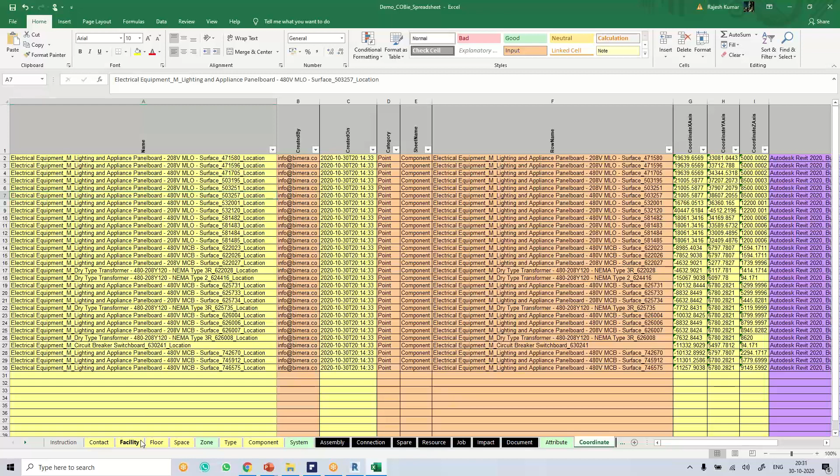Suppose this information is common for multiple files, for example a mechanical file and an electrical file, two Revit files. I have two Revit files. Okay. For the electrical file, I exported the information, so I got this information, like what you got now.

Okay. Now I open the mechanical Revit file. I want to append that mechanical information to this COBie spreadsheet. Is it possible? Yeah. If it is possible, then what about the existing information? Okay. Let me show you. For example, the facility information should be filled here: go to Manage and Project Information, where I can see the facility information.

Correct? So the project name and linear units, like site name. Let me go with the site name Dubai or something, and the facility description, whether it's an educational college or something. Okay. And the project description, it's a college west or something, and site description west phase, like west zone, west phase-01 something, like we have a number of codings.

For the category, COBie.Facility.Category, I can say that it's an educational college or something else. For COBie.Facility.Name, I can say the college name, it's BIMERA College.

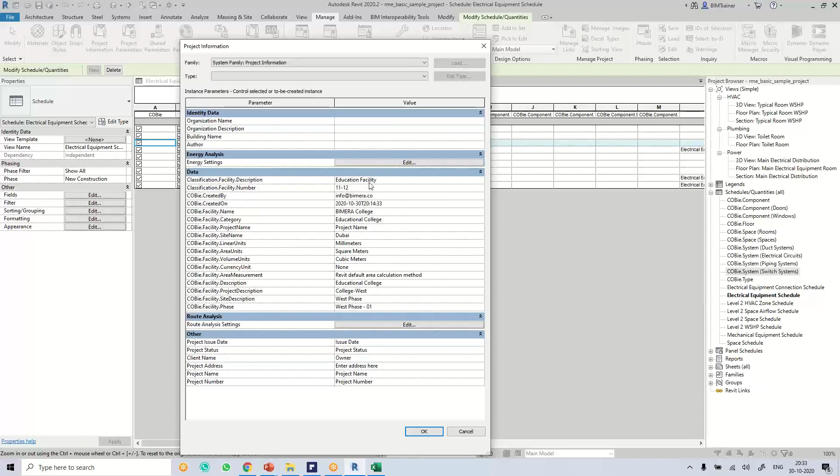Okay, so the complete information has been filled here, correct? So when I click OK, now this is new data, and I would like to append this information to the existing data, to the existing spreadsheet. Let me go to the BIM tools and update this. Set all for all, apply and close.

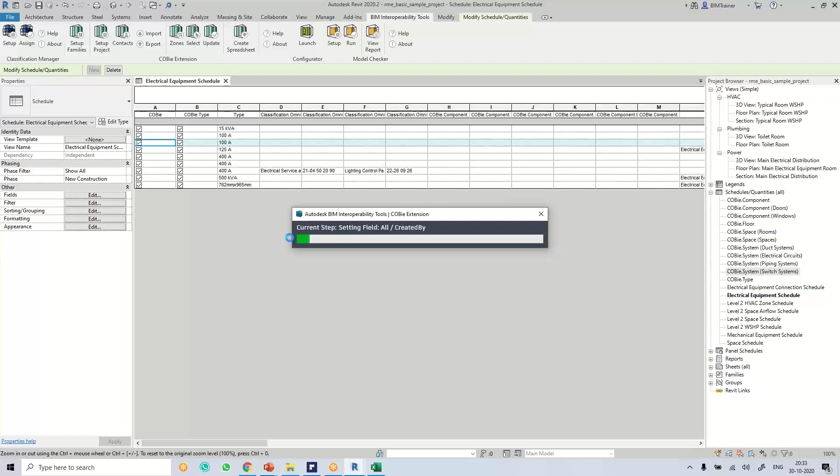And Azmal has a question: we can do COBie by Dynamo also? Yes, of course. It's an advanced thing. You can fill information from one parameter to another parameter, so that is possible. I worked on it, and we have created a script on how to work with COBie with the help of Dynamo. How to see all this information inside after 5 or 6 years.

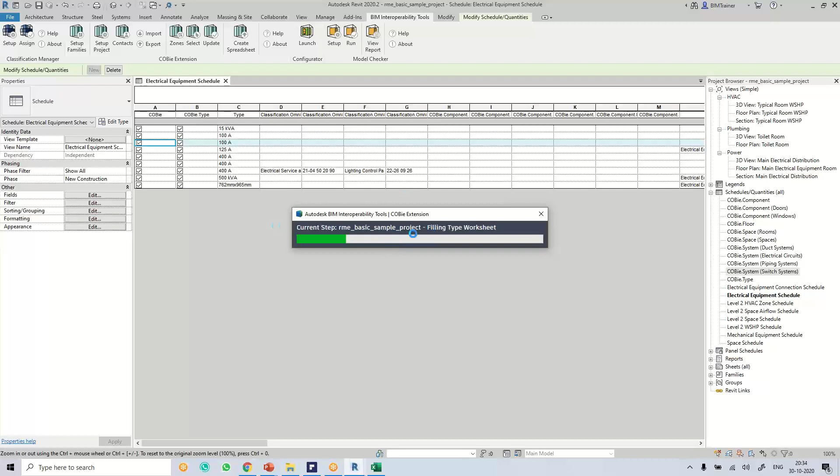Okay, fine. Let's see now what is exported. Where is the spreadsheet? Create a spreadsheet. So let me go and append this to the existing demo COBie spreadsheet. If it is a different model, let me go and check. Open file. So see this.

Now we had only one piece of information here, but this is additional information extracted from the different model. So it has appended, right? So this is how you can simply append information from two different models. In the existing data, the category is NA, not applicable, and now there is Educational College. The project information, Dubai, millimeter, square meter, the complete information is appended here. Are you clear?

If the mechanical model also has the same project information, will it override the existing one, or will it create a new line? You have to understand one thing: if it is a new file, there is nothing existing, it creates it from the model itself. If you're appending, the existing data exported from the electrical model will remain the same. There will be no disturbance at all, and the new data is added next to the electrical. For example, this is electrical stuff and this would be the mechanical stuff. Appending means adding to it. It's not overriding.

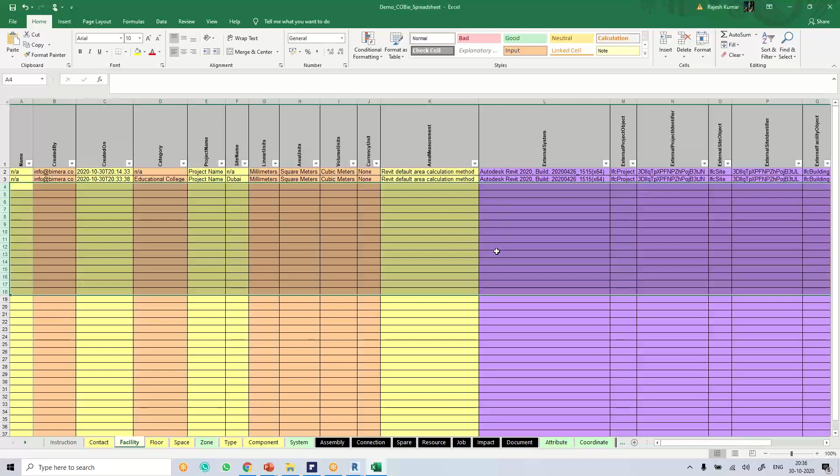Simple question. Is there any workflow to automatically fill the blank sheets like assembly, connection, spare, resource, job, impact, or document? Maybe a workflow to automate this via another tool? Can I answer this question? Yeah, this we can do with Dynamo or API tools. Exactly. Your good name, please? Malik.

Hello, Malik. How we normally manage it, just for your information: take the example of spare parts. For every type we need a list of spare parts. So we can maintain one database, all the types' spare parts in one single spreadsheet. Based on the types used in the current project, you can retrieve them and fill the data here in the Excel sheet by using Dynamo.

Actually, there are different kinds of automation processes, Malik. You can do it with Dynamo or any Revit API tools. Surya has a question: does anyone have Revit API exposure? Yes, I'm an expert in Revit API, and we can do that.

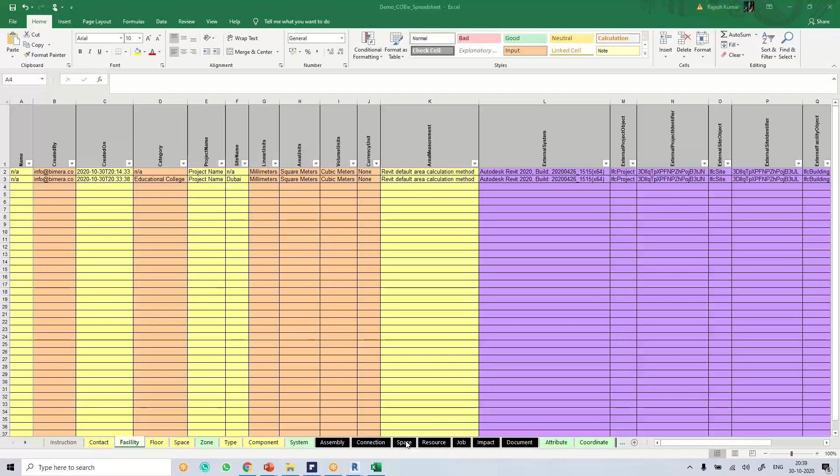For that sake, we have an additional tab here, because it's like a spare. Okay. So that information will be filled here itself. Yes. That's something we can do with MicroStation, but Revit doesn't have the capability of collecting the spare parts. So multiple spare parts we can't bring in, and we can't show them for a single element.

Okay, I have a doubt. Pawan, can we create one object from different families and group it in Revit? Yes. And we can show that as the 5 spare parts of that equipment all together. Can't we do it like that? Those we can do. We can do nested families, and inside that we can map the information. It's possible, na? Yeah, it's possible. During which phase? For example, if you are going for LOD 500 or LOD 400, you keep the detailed information. If you are going for COBie, it's almost like you are going for facility management.

Okay, I just want to make it clear. LOD 500 doesn't mean it's like this. Yeah, it is possible, but they need to put in the effort. Yes, it's tedious, that's what I've told you. It's a tedious procedure. So mostly they will do it manually. All this non-BIM information, the black colored tabs, we need to adopt this. This is the simplest method. Okay, thank you.